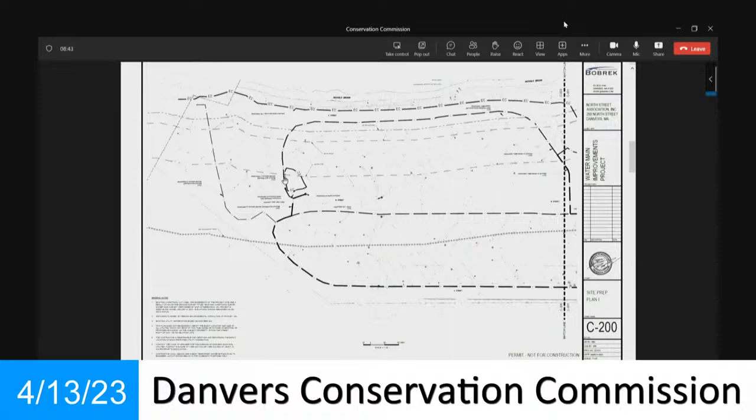You can see this is a site prep plan, so it'll show setting up the bypass and setting up stockpile areas denoted by the circular erosion control shape. The temporary bypass consists of a 6-inch pipe to temporary hydrants so that we maintain hydrant. Above ground? Above ground, yes. And we'll have services that will most likely connect to each mobile home in one way or another. That's a lot of connections, huh? Yes, it's a lot to do the bypass and then the permanent for sure. Next page, please.

So this is the other half of the site. We'll be connecting the bypass to a hydrant in North Street here. And that'll provide service for the bypass. You can see another stockpile area set up in that location as well. Yeah, next page is good. Sorry, there's a stall. And if you want to point anything, you can take the mic off and bring it right up if you need to. Okay.

So why we're here, you can see that Nichols Brook runs along the site, so we are within resource areas. This is the same as the western half of the site, but with permanent water main services and trench, buried completely underground. All surface disturbances will be restored to their existing condition. So there's no change in pervious surface on site.

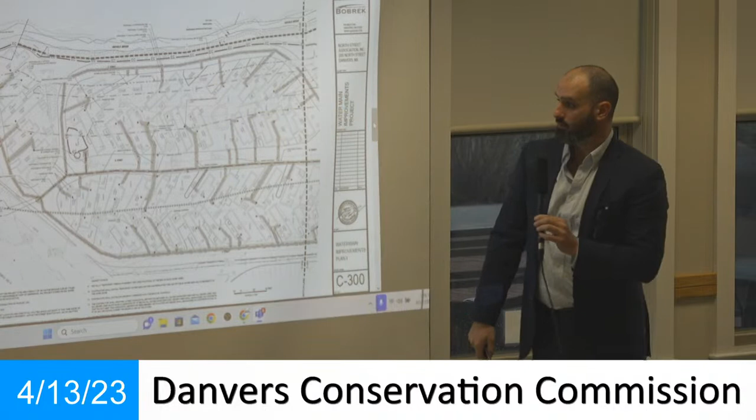So in terms of disturbances, the 200-foot riverfront line is right here. The 100-foot wetland buffer is there. This is the 50-foot, and this is the 35-foot. So most of the project is within the 200-foot riverfront. There's a good amount that isn't, along A Street.

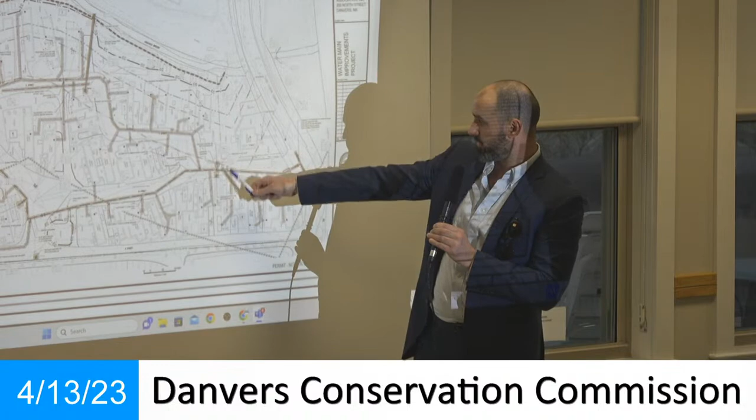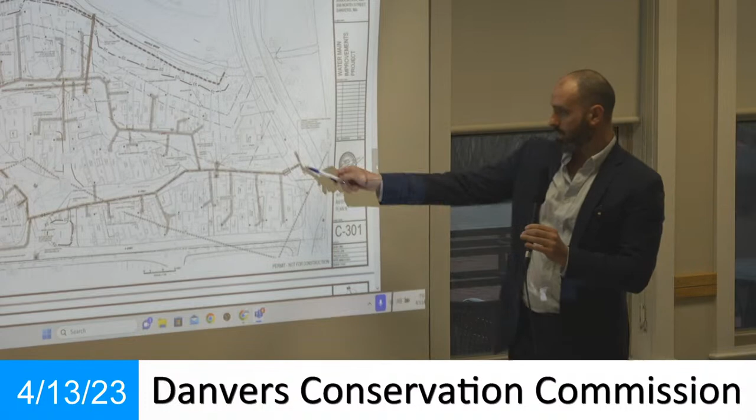We will also replace these two catch basins here and this catch basin here with leaching catch basins to promote more infiltration on site. We will be connecting the permanent water main to the water main on North Street. There'll be a meter pit here, which will control the water for the entire site. It'll keep track of all the flow.

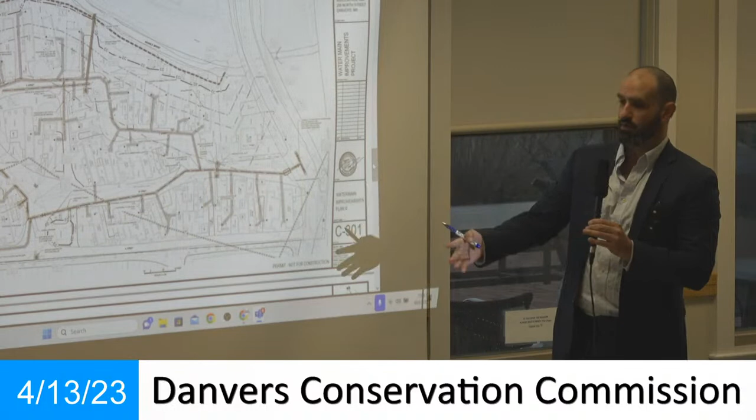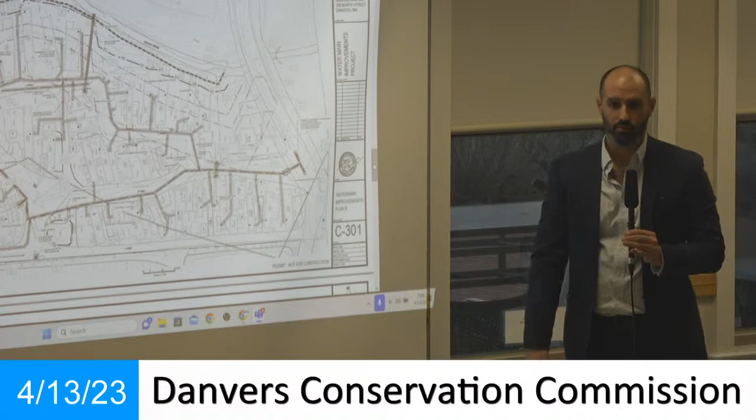Throughout the site, we have erosion controls, basically along the brook. And for the most part, while they're excavating, while they're trenching, they may use these stockpile areas, but chances are they will pile the dirt on the road next to the trench, and then they'll backfill at the end of each day. So there really shouldn't be much excess soil overnight or throughout storms. And I believe we have a stipulation in there for a storm event where if a storm event is imminent, they'll make sure the trench is backfilled completely before leaving the site or before the storm arrives.

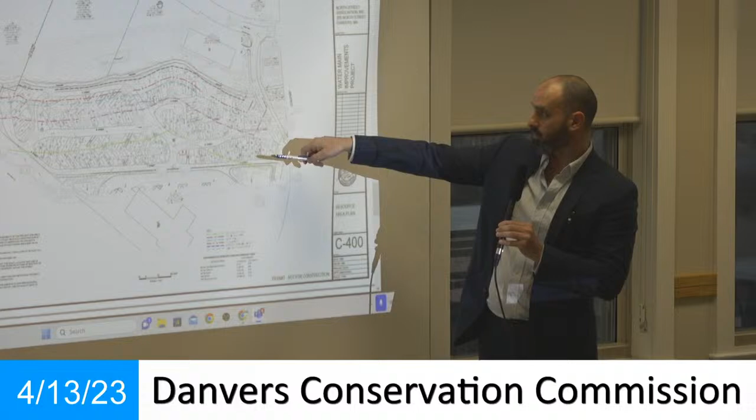Next. Yeah. This is our resource area plan. You can see the green is the 200-foot riverfront. Magenta is the 100-foot wetland buffer. Blue is the 50-foot no build, and the pink or red is the 35-foot no disturb.

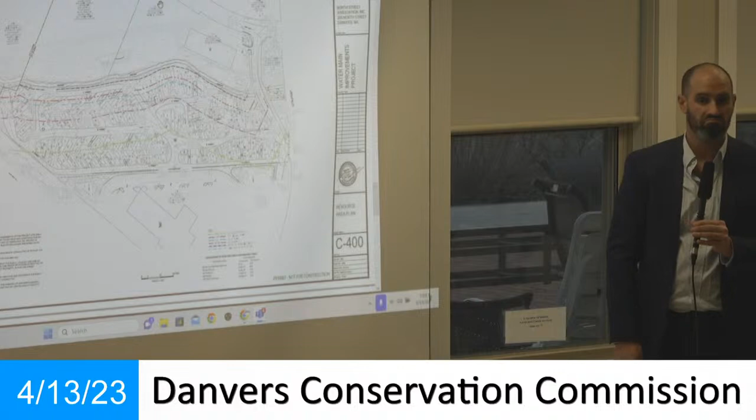Any questions? Sure. First one, George, there's no waivers required here, right? No, there is work occurring in the 35 and 50, but it's work that's already been there, so there's no new alteration. Okay. All right, I'm just going to pass it along with people's questions.

So, Mike? Just first, is this the park where you're going into the Honda place? So that's the one that recently was co-opted, right? The Honda building is right here. Yeah, so it's the one that was recently a co-op. So the applicant, it says the applicant is Monroe Wallace. Is the applicant North Street Association, is that correct? The North Street Association, yeah.

Yes. I'm on the notice of intent, but I'm actually... Do you mind going to the mic? Sorry. Just for the record. I wanted to clarify that. My name is Wallace Monroe, 200 North Street Association. I'm on the notice of intent, just working through the Bobrick Engineering Company, but it is North Street Association. We became a co-op 2 years ago. This is our second year. Okay, thank you, I was just curious on that.

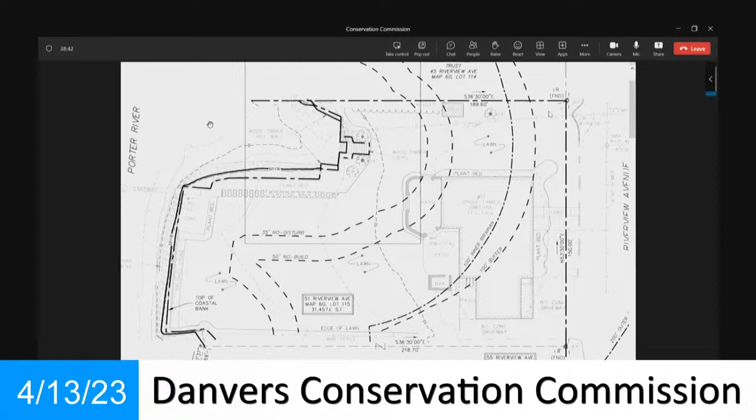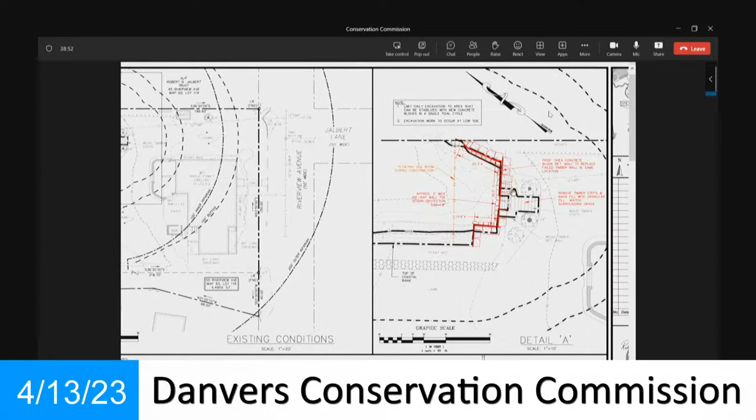So our proposal is to disassemble this portion of the wall. It's about 70 linear feet, and then reassemble it with a gravity block wall, or you may know a Shea block wall. The commission is well familiar with this because there are two projects on Tibbetts Avenue that were recently just completed, the same type of wall, where you put a stone base or a stone leveling pad down, and then you just bring the blocks in and stack them up. They're interlocking, and you just stack them one on top of the other.

So it occurs basically right along the same footprint of the existing wall. The only difference is there are these timber steps, and they are not needed anymore, so we'll just remove those steps and backfill that section, and they will not be reconstructed. The access is perfectly open and level from Riverview Avenue.

On the second sheet of the plan, you don't have to go there, but the second sheet has sort of a construction sequence and an erosion control detail. There's a construction entrance pad, a stone entrance pad from the street to the property. It's a straight shot right across the lawn. They'll be using a mini excavator to do the work. They will work at low tide when they're having interface with the mud flats.

We've already got our review back from the Division of Marine Fisheries, and their suggestions were to work at low tide and do everything from the land side. The interesting point they brought up was they're not in favor of installing silt booms in tidal areas because they feel they are ineffective. As long as you work during low tides whenever you're interfacing with the flats, and work from the landward side, they don't recommend installing that. So it's up to the commission whether they want that as a condition or not. We showed it on the plan because typically in the past, that's what the commission likes to see.

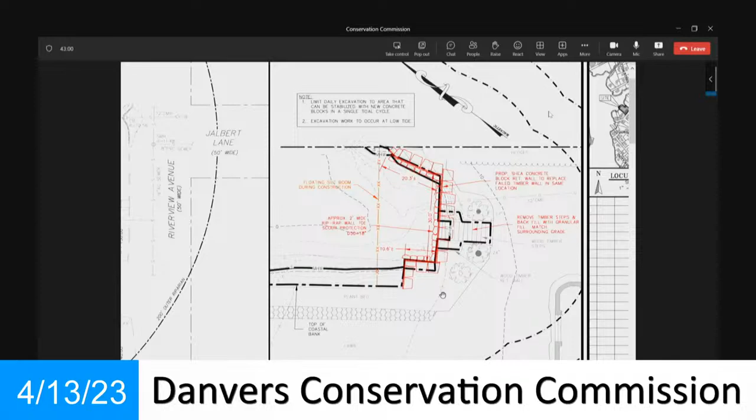Vanessa, any questions? Yeah, I have a question about the height of the wall. Is it around 9-ish feet above mean high tide? No, the face of the wall at low tide is about 4 feet high. Okay. You can see from the contours here, elevation 2 intercepts the wall, and then here's elevation 6. So it's a 4-foot face. I think that's 9, though. What, Georgia? I think that was a 9. I had estimated the top of wall at elevation 9.

Anyways, the question, I'll just tell you why I'm asking. So Georgia had left us a note that the seawall, the top of it was about 9, but the base flood elevation was 10. So I was asking about raising, should it be raised a foot? No, it won't matter at all, because just raising that one section of the wall is not going to stop any flood incursion. It's just going to go around it.

Is that because the rest of the wall and the other section of the yard is at 9? Yep, and not to mention the abutters' property and everybody else. Okay, so just that one section won't flood. This is an AE zone, so on an advancing flood, everything is flooded equally.

Okay. And then I just had one question about the steps that aren't being replaced. So what was the previous function of them, and why is it decided that they don't need to be there anymore? The previous function was apparently just to get down to the flats, but they have a licensed ramp and float, so they don't need to get down that way. It's just another maintenance issue.

And not to mention that with this style of wall, it's kind of difficult to build in steps with it. It's easier to just run a straight shot. Okay, so that's all going to be removed and then filled in? Yep. Okay. I don't think I have any more questions right now.